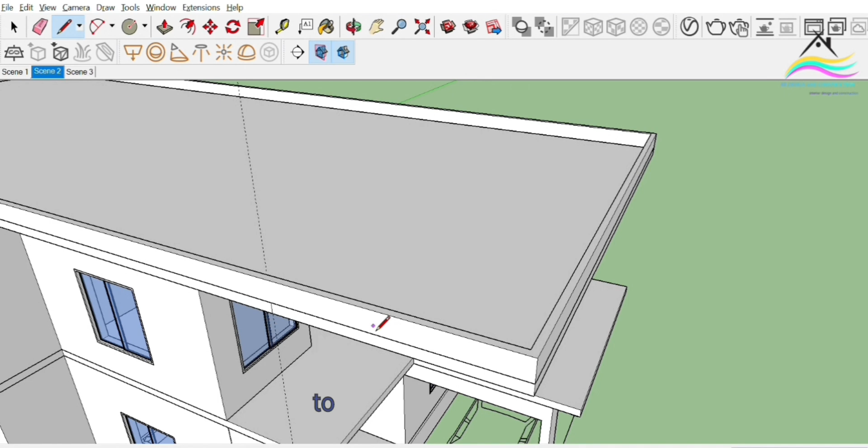...reduce heat buildup. Light filtering allows natural light to filter through, which can create interesting shadow patterns and reduce the need for artificial lighting during the day. Weight reduction. By removing portions of the wall, the overall load on the structure is reduced, which can be beneficial for structural design and cost efficiency.

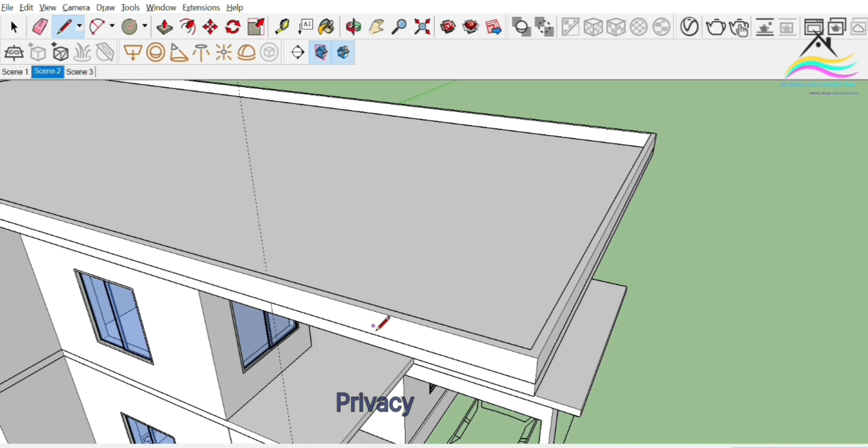Privacy and safety. While allowing light and air to pass through, perforated parapet walls can still provide a degree of privacy and fall protection. The size and placement of openings can be adjusted to maintain safety standards.

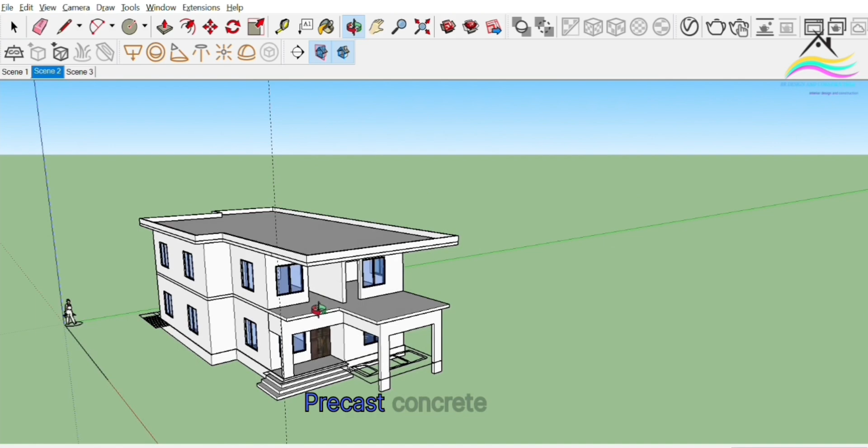Common materials used. Brick or concrete blocks. Openings are made by leaving gaps between bricks or blocks. Precast concrete panels. Custom designs can be manufactured with high precision. Metal panels, often used in modern buildings with laser-cut designs. Wood, for temporary or aesthetic installations, although less durable for long-term use.

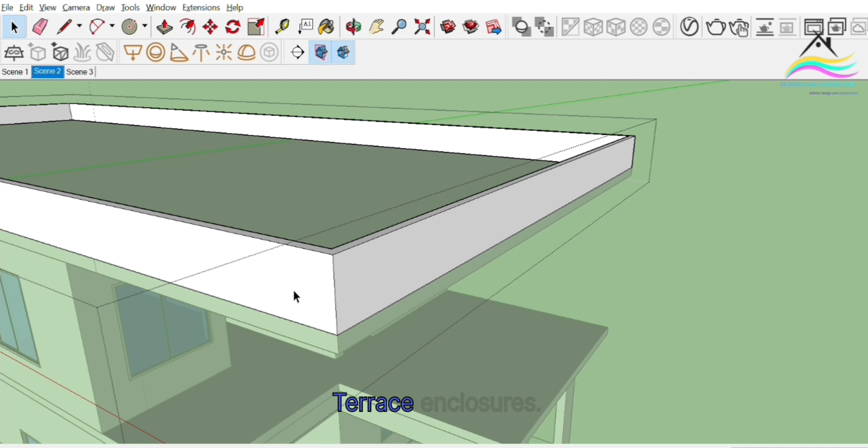Applications. Rooftop boundaries. Balcony walls. Terrace enclosures. Garden walls. Decorative screens on building facades. Considerations for design and construction. Structural stability. Openings must not compromise the integrity or strength of the wall.

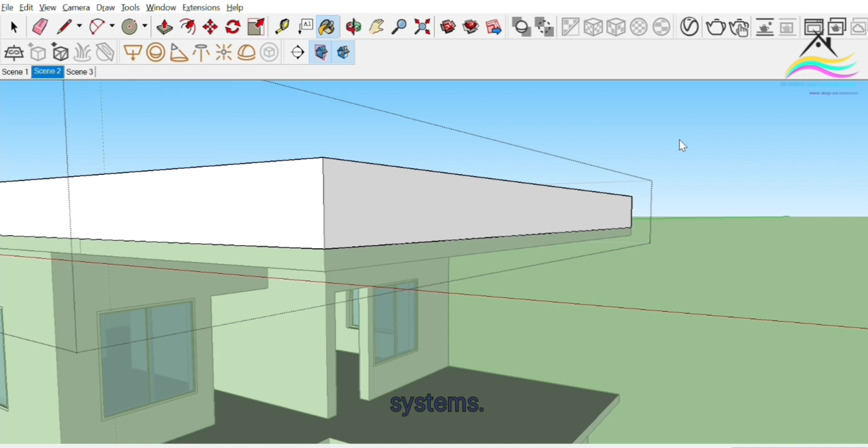Weather protection. In areas prone to heavy rain or snow, perforated walls may require additional protection or drainage systems. Code compliance. Must meet building codes related to height, opening sizes, and load-bearing capacity.

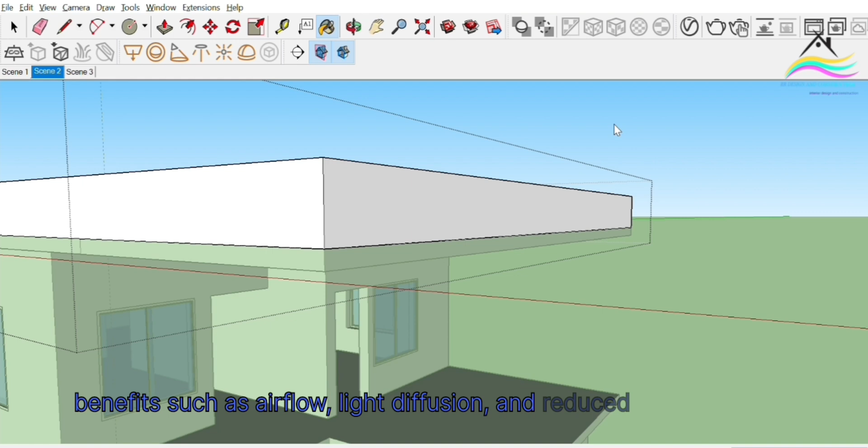In summary, a perforated parapet wall serves both functional and decorative roles in modern architecture. It offers a blend of utility and style, enhancing the aesthetics of buildings while providing benefits such as airflow, light diffusion, and reduced material usage. Proper design and construction are essential to ensure that these walls remain safe, durable, and compliant with building standards.

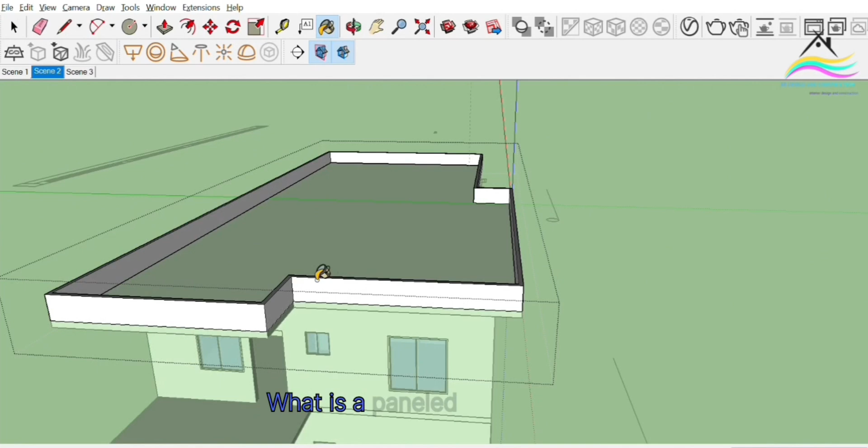A paneled parapet wall is a type of architectural feature commonly used in buildings to enhance both aesthetics and functionality. Here's an overview of what it is, its construction, and its uses. What is a paneled parapet wall? A paneled parapet wall is a parapet, a low protective wall along the edge of a roof, balcony, or terrace,

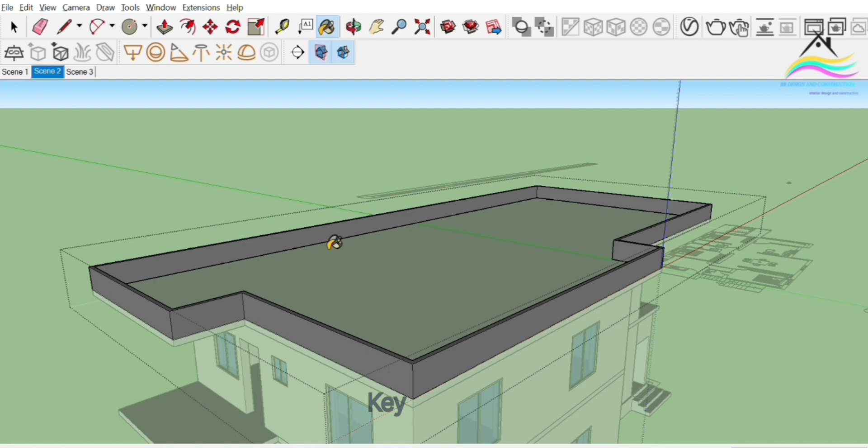that is divided into sections or panels, often using decorative or structural elements like pilasters, molding, or indentations. The panels can be recessed or raised, and are typically arranged in a repeating pattern to add visual interest. Key features. Panels, distinct sections, usually rectangular or square, formed by either projecting or recessed areas on the parapet surface.

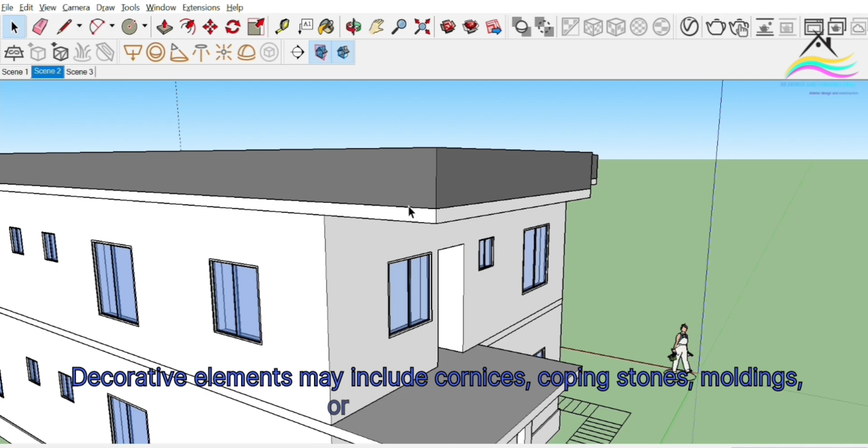Materials, commonly made of brick, concrete, stone, or plaster with finishings such as stucco or paint. Decorative elements, may include cornices, coping stones, moldings, or ornamental caps. Height, typically extends to 3 to 4 feet above the roof level, depending on design and safety requirements.

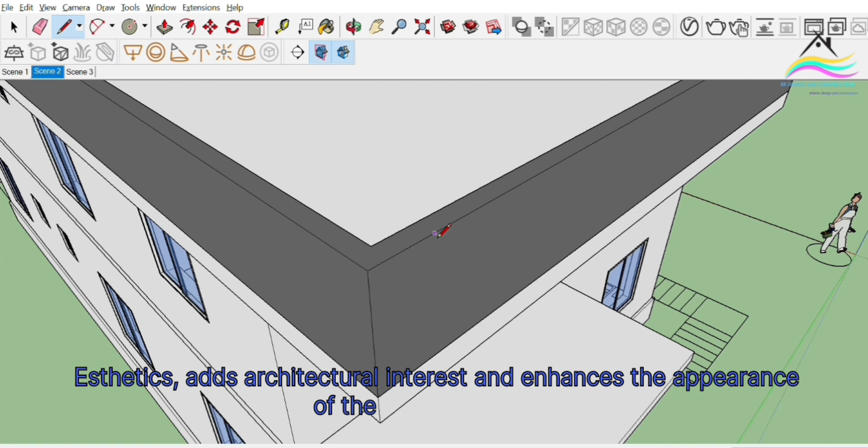Functions of a paneled parapet wall. Safety, acts as a guardrail to prevent falls from the roof or balcony. Aesthetics, adds architectural interest and enhances the appearance of the building facade. Concealment, helps hide roof equipment like HVAC units, water tanks, or solar panels. Wind protection, reduces wind uplift and protects the roof structure. Rain protection, when designed properly, it directs rainwater away from the roof edges.

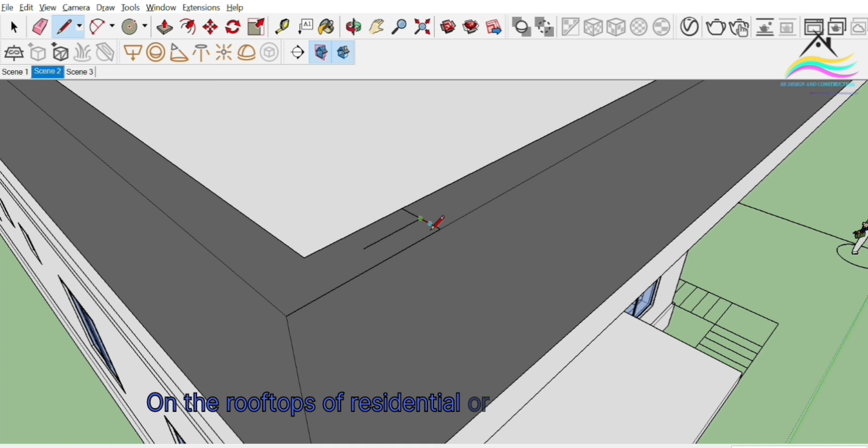Common applications. On the rooftops of residential or commercial buildings. Around terraces, balconies, or verandas. In heritage or classical architecture, where decorative paneled parapets are part of the style. In modern buildings, where minimalist panels may serve a sleek, clean design purpose.

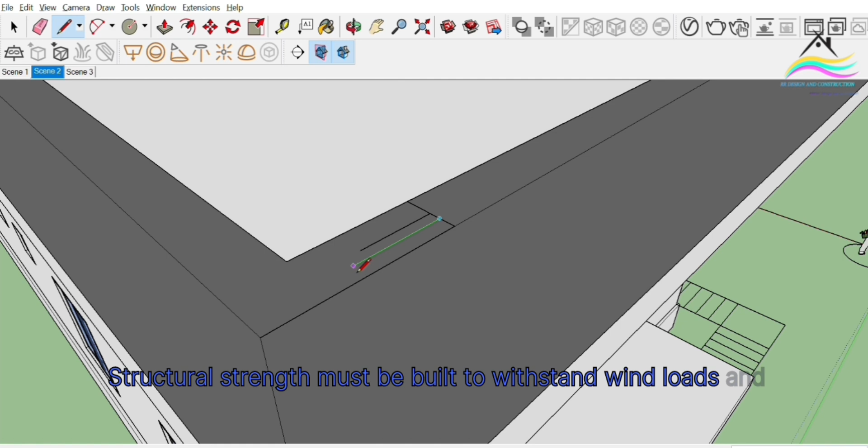Design considerations. Structural strength, must be built to withstand wind loads and seismic activity if applicable. Waterproofing. Needs proper drainage and flashing to prevent water infiltration. Material compatibility, should match or complement the main structure in terms of materials and finish.

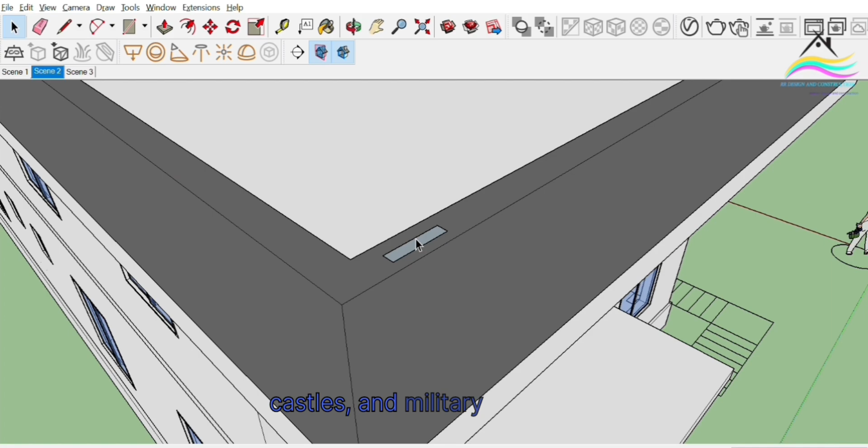An embattled parapet wall is a type of architectural feature commonly found in historical fortifications, castles, and military structures. Here's a detailed explanation. What is an embattled parapet wall? An embattled parapet wall is a low protective wall along the edge of a roof, balcony, or terrace that is notched or crenellated, typically for defensive purposes.

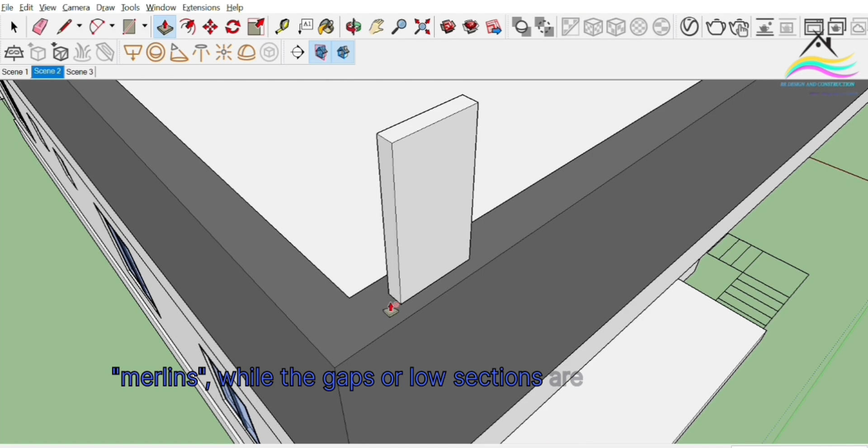The notches are known as crenellations, and the alternating high sections are called merlons, while the gaps or low sections are embrasures or crenels. Key features. Crenellations, or battlements. These provide cover for defenders while allowing them to shoot or observe through the gaps.

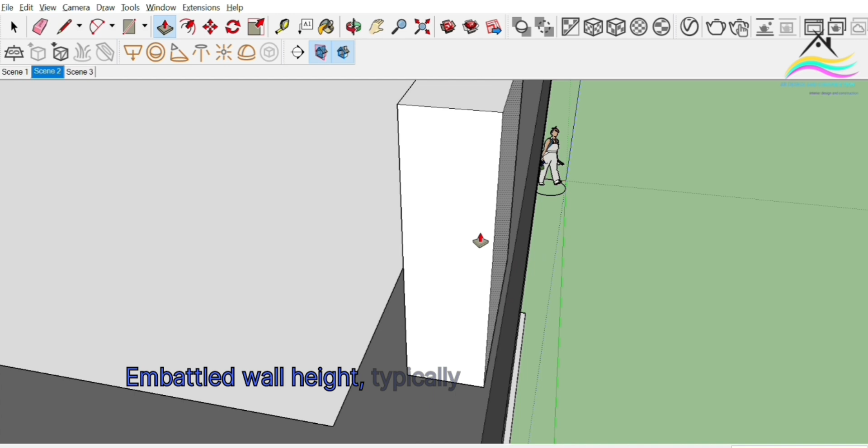Merlons, solid uprights that provide protection. Embrasures, crenels, openings through which arrows, spears, or later, firearms could be used. Embattled wall height, typically about waist high, allowing defenders to crouch behind them. Purpose and use. Military defense.

Originating in medieval times, embattled parapet walls were a vital part of castle and fort defenses. Symbolism. In later periods, embattled parapets became more decorative, symbolizing strength, security, and heritage.